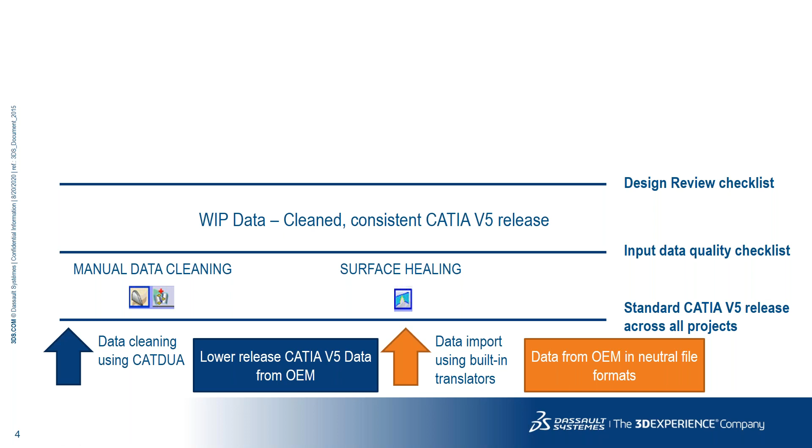Once you're done with your modifications and want to share it with manufacturing downstream departments, or with your OEM for review and confirmation, if you are the product owner, you may want to remove sensitive information from the data to protect your IP. In that case, there are tools available in CATIA v5, called product data filter, using which you can remove your IP and securely share your data with the OEMs.

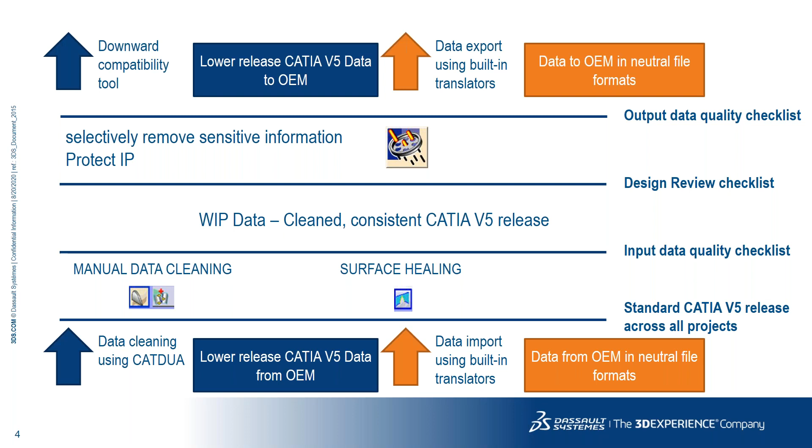From any release of CATIA v5, you can use the downward compatibility tool to downgrade it to the required level at which the OEM is working. Or if required, you can export it using the built-in data export translators. So, all said and done, there is some challenge in terms of downgrading surface data from a higher CATIA v5 release to a lower one. If there is surface data, the bypass is to use a neutral file format, and then you can open it at the required level.

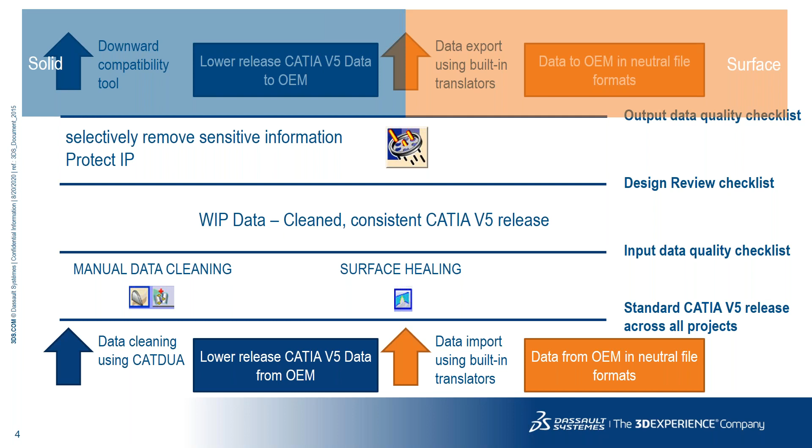So this is what we showcased, and we checked the feasibility with the suppliers. But we got feedback from our customers, the automotive suppliers, that there are multiple environments you need to work on, since OEMs specifically ask you to work in these multiple environments. Just for your information, I've displayed a list of which OEMs are working in which releases of CATIA v5, based on our information.

Basically these are the SRs being raised on that particular environment, that's where we've gauged that data, and it's based on figures from the 16th of December 2019. So it might not be the latest, but it shows that right from R18 till R30 now, there are multiple releases, multiple service packs and hotfixes being used.

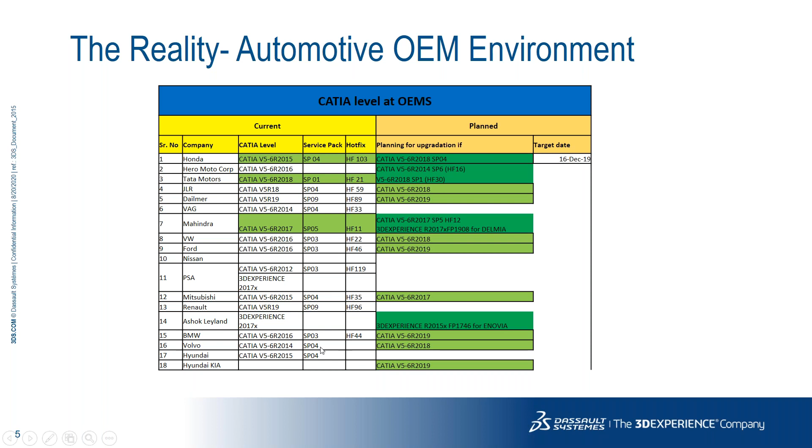Typically, in order to ensure data consistency, if you are sharing parametric data with the OEM, you don't have any other choice but to work with multiple CATIA v5 environments, and that's where the challenge is.

More so, in the last six months, we have seen our customers facing a lot of issues and challenges in terms of working remotely. So when we deep dive and understand what kind of challenge it is, there are typically three challenges in terms of working remotely.

The first one is access to the license. Most of the time, there is a dedicated license server on which the license is requested, and since you are working inside the LAN, you can ping that particular server and fetch the license to continue working. But when working from home or remotely, you're not able to go to the office, so the license has to be available from a remote location. In that case, there are two options available: you can take the license offline onto the local machine, or connect to your company network through VPN.

Another challenge is accessing the data. The data is most of the time stored on a central file repository, and in order to access it, you should always be connected to your company network through a secured VPN and a stable internet connection.

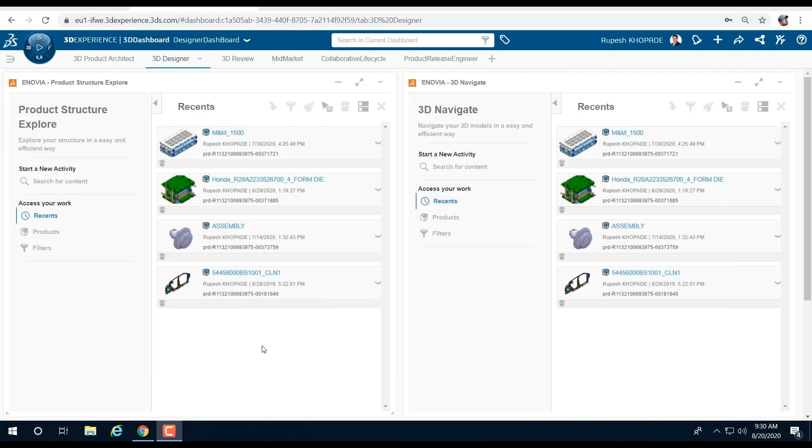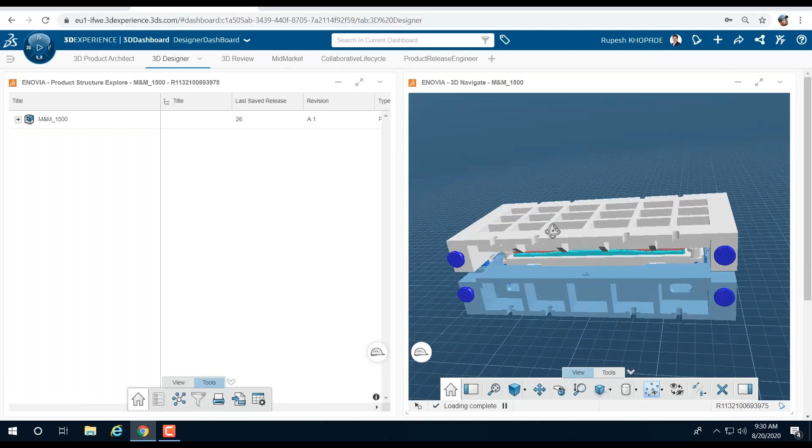So this is the visualization of the data that you get. This is the Product Structure Explore widget, which gives me access to the product structure information for my data, and this navigation window gives access to the visualization of the data. You can do multiple tasks using 3D Navigate, wherein you can do measurements, or different checks.

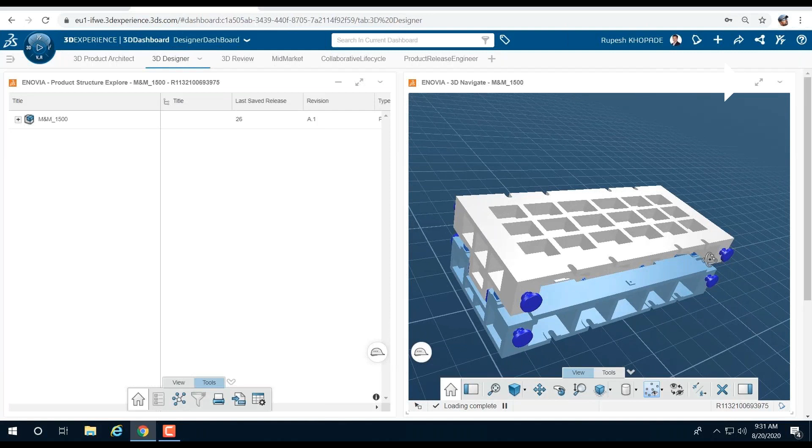One important piece of information shown here is that we have configured a column which showcases what is the last saved release of that particular data I'm working with. In order to work with that data, or open it, today there is no possibility to see which release was used to create or modify that data. So since I have this information, I can decide which release I am going to use in order to open this data.

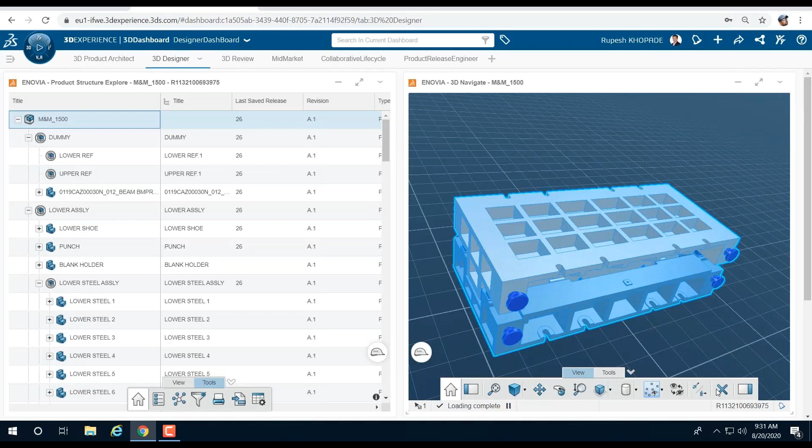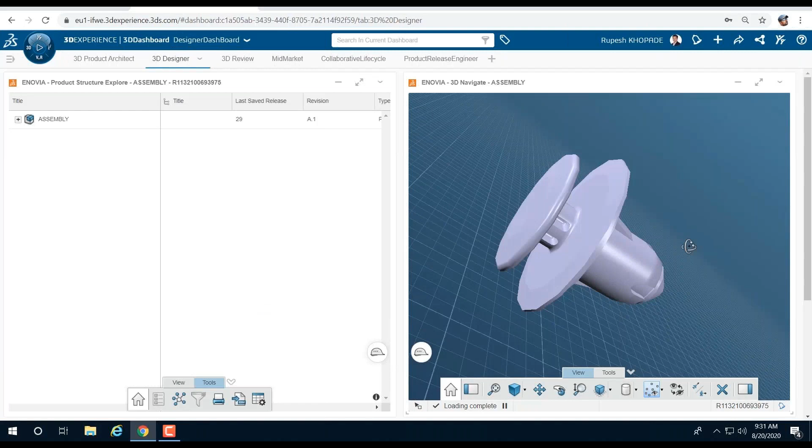Similarly for another set of data, I can visualize what is the last saved release. This is basically a parameter we have configured, and it fetches information from my CATIA data. For the sake of simplicity of the demonstration, we will use this small subassembly of a fastener.

Directly from the 3DEXPERIENCE platform itself, I will be able to open my CATIA V5 data. Now when I say open, it will start a launcher - a very important utility which will help me map the OEM environment I'm working with. So the designer, even if he is not aware of which release to use for which OEM, this utility will take care of it. The administrator can configure this utility, and it's very easy to deploy.

You can deploy it at all the designers' workstations, so that without knowing what is the release for a specific OEM, they will be able to launch the correct environment in order to modify that data. Now if you see here, we have just done this mapping for a representation - this is not the exact mapping, it can be configured as per your requirements. For example, for a specific OEM project you're working on, there is a defined release, so that can be configured. That's basically a one-time administration activity.

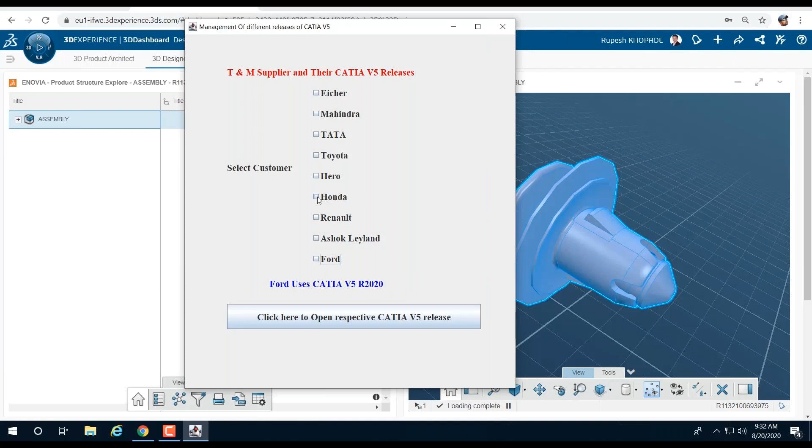So you select different OEM environments, and if you see here, this CATIA V5 release gets updated. So as per the mapping, whatever OEM environment I select, the specific CATIA V5 release is launched.

So the first thing is I will be able to see what is the last saved release of that particular data. What happens if... there are three different use cases I will be dealing with. First is I try to open it on a lower release. As you are aware, it's not possible to open CATIA V5 data on a lower release, so you will get a notification and data will not be loaded into the environment, right?

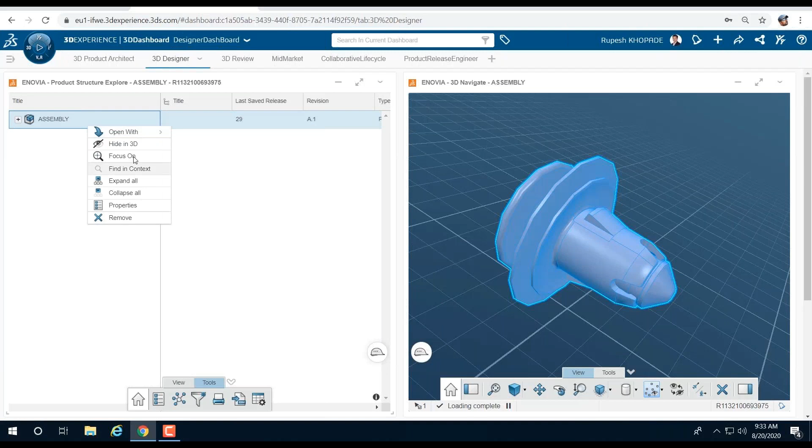The other case is I use the same release as the last saved release for that particular data, and I try to open this CATIA V5 data.

So here you see the data has been loaded in CATIA V5. Also, what we have done is we have created a few utilities within CATIA V5. So for example, the data is already loaded and I didn't observe what is the last save release in the browser. So is there a possibility that I can cross-validate within the CATIA environment whether there is any mismatch between my data which is loaded and the CATIA V5 environment in which I have loaded this data?

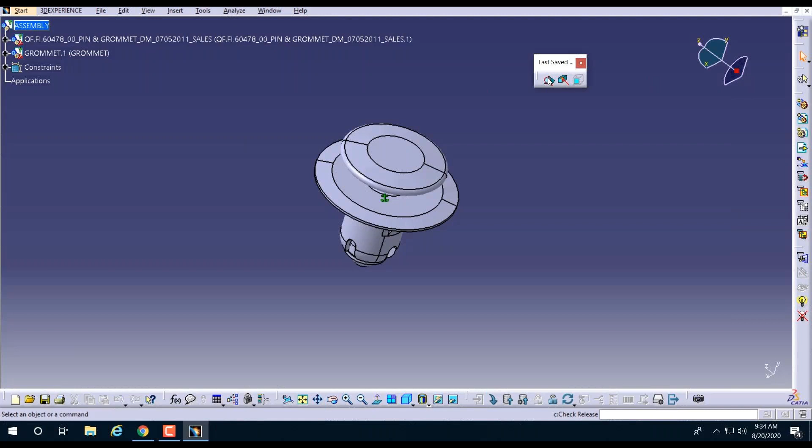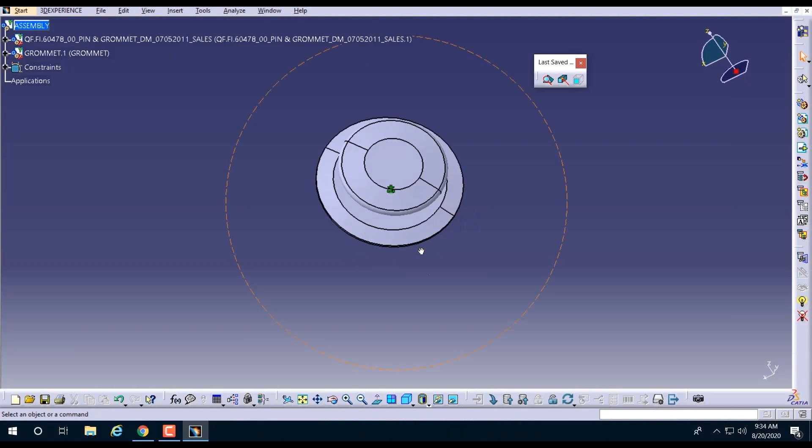Okay, so there is a utility which basically gives you feedback about, for example in this case, the system configuration, that is, the CATIA V5 is R29, and the last save release of this particular file is R29. So this matches. So this is basically a kind of clue for the designer to continue working on this particular data, so that you can avoid version mismatch.

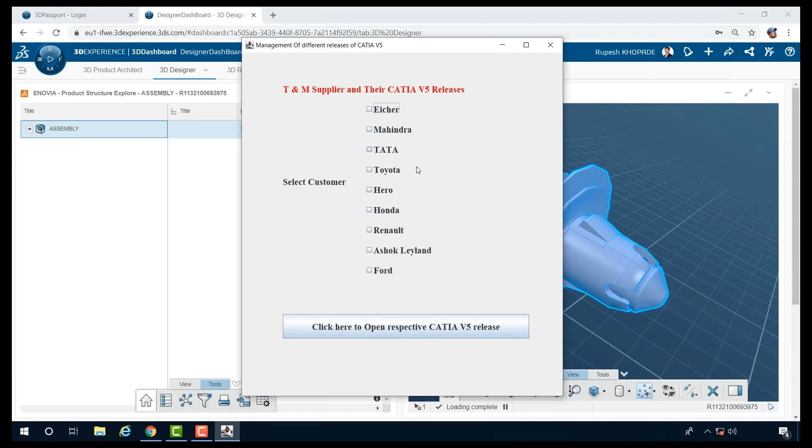Okay, now what if my project requirement is on a higher release of CATIA V5? Okay, so in that case, what you can do is you can duplicate the data that you're going to modify, and you can save that duplicated data on the higher release, so that the lower release data is still available for the specific project for which it was created earlier. So you're basically solving two purposes. You are able to modify it on the higher release, as well as keeping a copy of it on the lower release for the existing project.

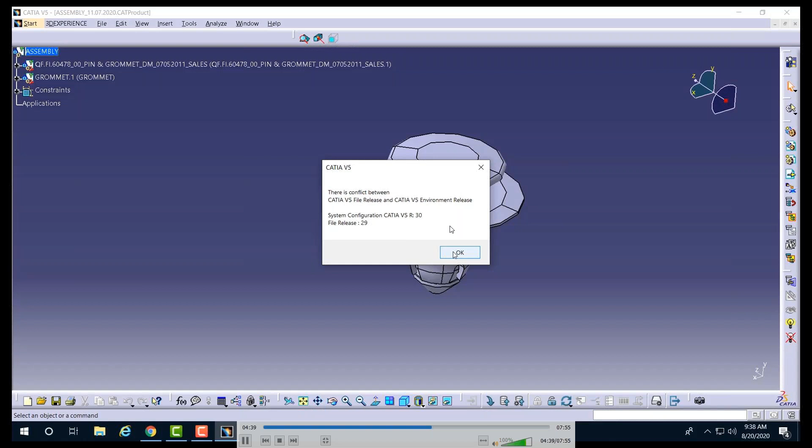So if you see here, we have loaded that data into R30, CATIA V5 R2020, and the file release is R29. So there is a conflict between the CATIA V5 file and the environment, right? So that's where we will be able to validate. Now I still need to modify it. So before modification, I need to duplicate this data on the higher release. Okay, so this is the data which I'm going to duplicate.

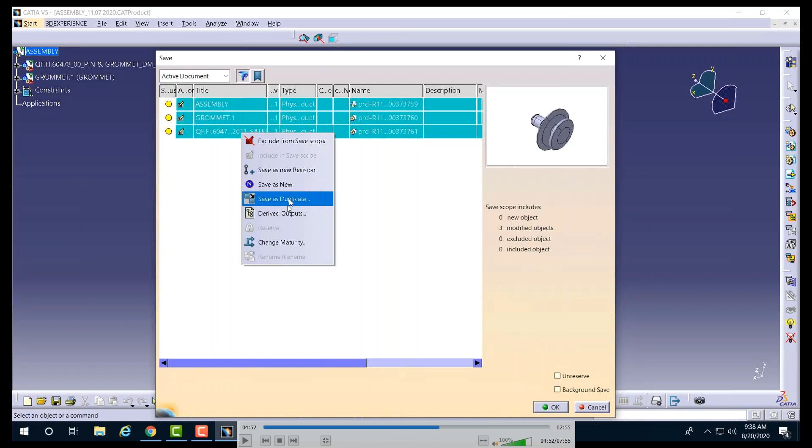So within CATIA V5, when you are connected to the 3DEXPERIENCE platform, you get an opportunity to manage the data, and from there you will be able to duplicate this data. So I'm saying duplicate data. What I'm doing here is I am mentioning the release. So all the titles for the data will be prefixed by the release information. You can change it as per your company standard or whatever practice you define. Okay, so once this is duplicated, I can go ahead and modify this particular data.

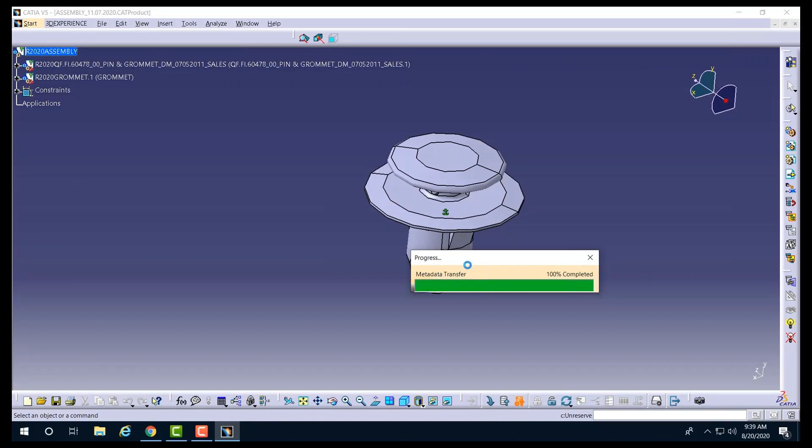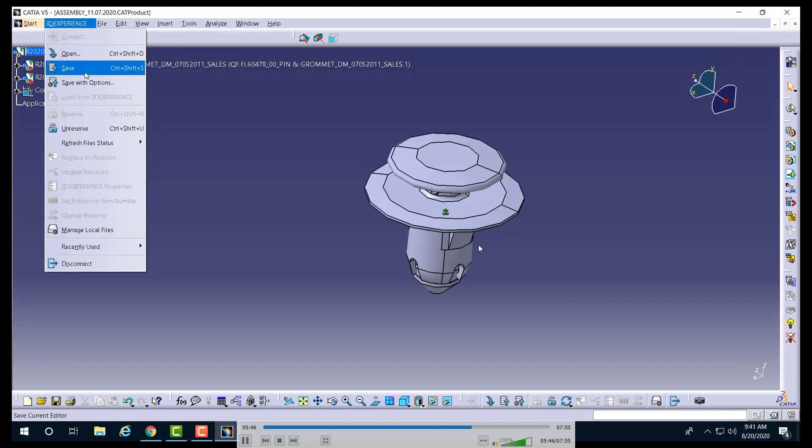There is one more thing I do here: I tag this particular data for the higher releases, so that the last saved release property will be available for this data set as well. So now, within my database on the server, I know that there are two data sets available for this particular assembly. One is on the lower release and another is on the higher release. So how do I identify that? And if there is any modification on the higher release and I get it done on the lower release, is there a possibility that I can compare these two assemblies?

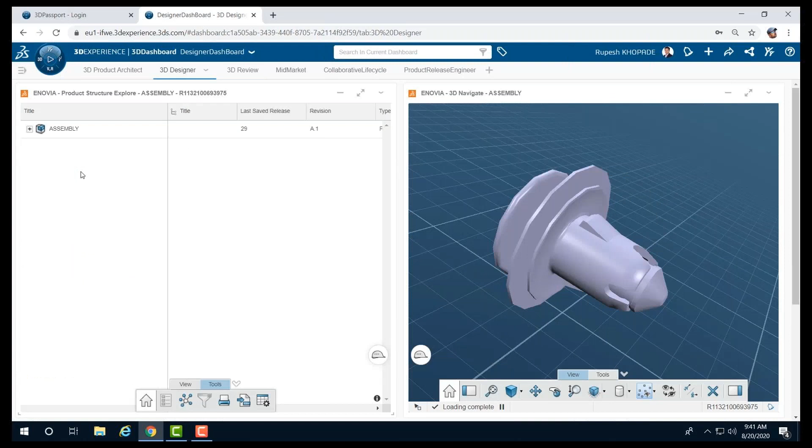Okay, so in the 3DEXPERIENCE platform, there is a widget called Compare wherein you can compare the product structure for the old assembly and the new assembly. So when I try to explore this particular assembly using the Compare widget, it automatically shows me there is a 2020-prefixed assembly also available. So you can directly select it from here. So this is basically a kind of intelligence built into the tool.

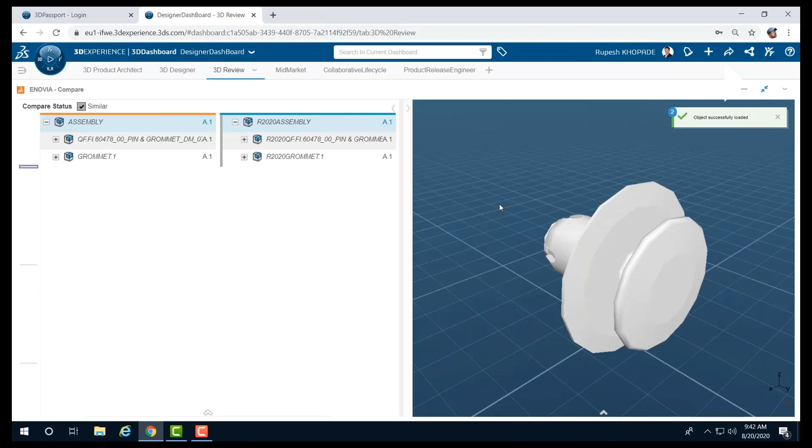If I select a specific assembly and there is a relation, two types of relations are possible. One is a revision relation, another is a duplicate relation. So it will identify and show you related sub-assemblies so that you can select it and compare both versions of that particular assembly, one on R29 and one on R30. Right now I've not done any modifications, but if you do any modification, you will be able to visually see what geometrical change was done in that particular assembly, sub-assembly, or component that you are going to compare.

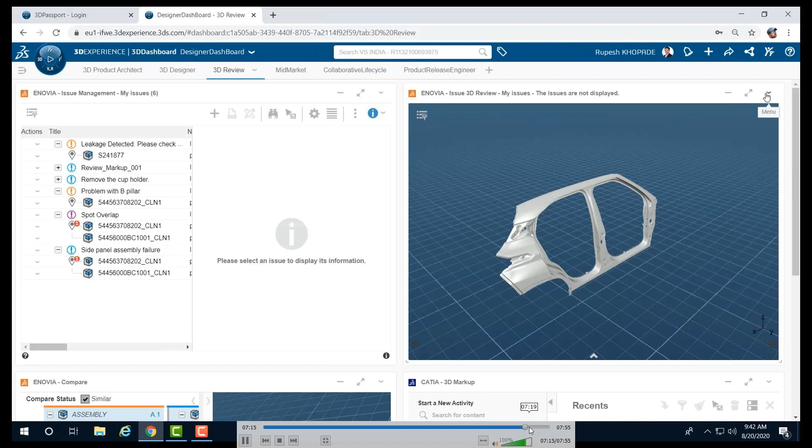How it helps is, I can go ahead here and export this data in a CSV format or in Excel format, which can be used for further downstream operations. For example, if you want to put this data into your ERP system, or you want to share this data with your tool room or your manufacturing department, you are able to communicate this information.

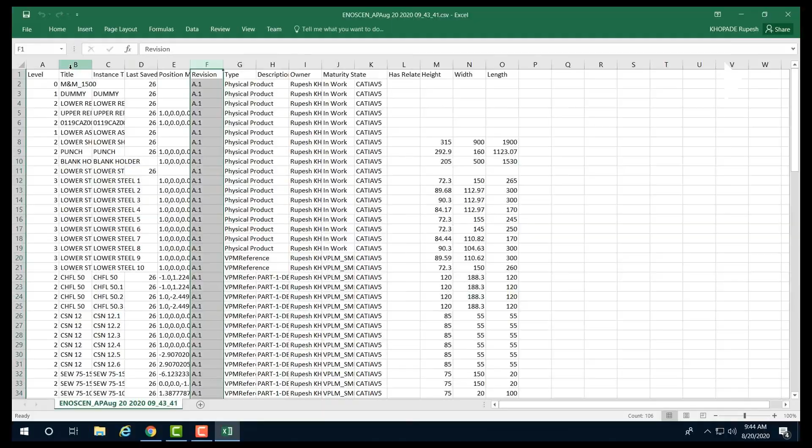And of course, this exported report can be configured. The columns in this report you can configure on your own, and you can change the required fields as per the requirement. So this is a quick demonstration of this particular solution. It brings a lot of value for designers and design teams, specifically in the automotive supplier space, who have to work with multiple OEMs with multiple CATIA V5 releases, and it facilitates the way of working and avoids rework.

Apart from that, the benefits we are talking about: there are two ways to have this solution, one is on-premise and another is on cloud. If you are accessing this solution on cloud, you get the benefit of business continuity on the go. Your servers are not affected by any natural disaster, so there would always be access to your servers despite a natural calamity, and there is a point in our service level agreement that we ensure 99.95% availability of our servers to our customers. So it is basically 24/7 access from anywhere.